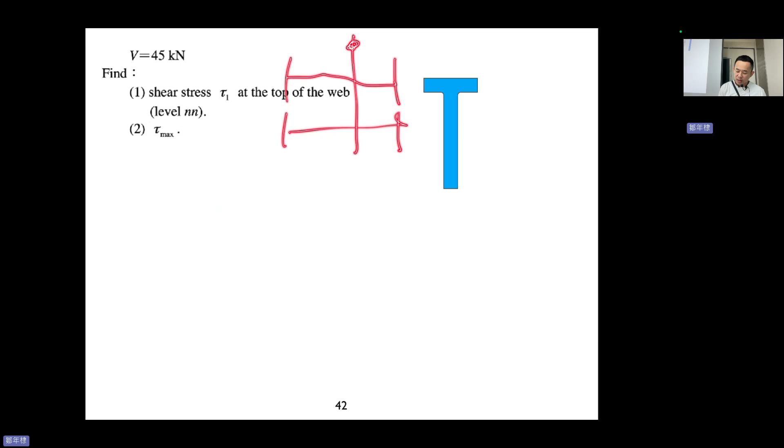We just tell you to ignore the chapter 4 things, we just obtain V equal to 45. Here V equal to 45.

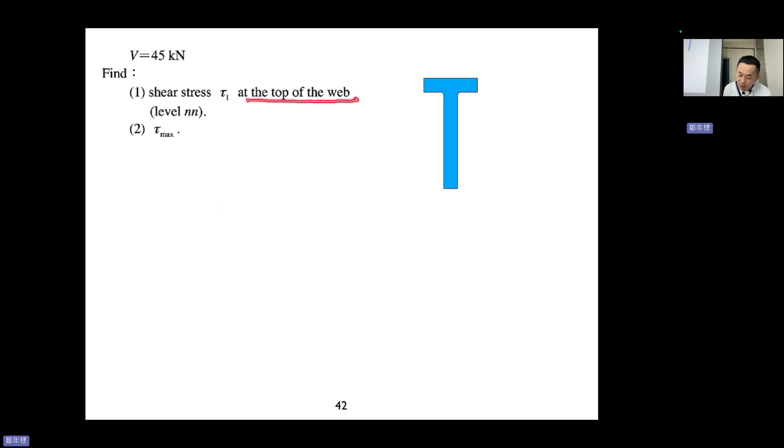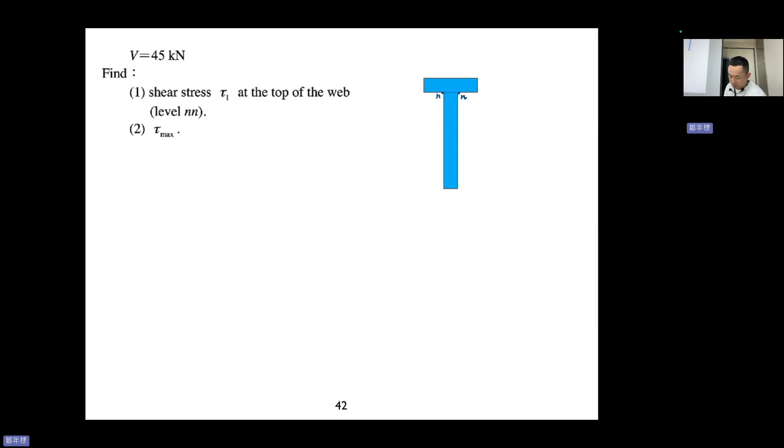What is the shear stress tau 1 at the top of the web level NN? What is NN? I will give you the NN point.

We want to know the shear at this level, this is called tau 1. So we want to obtain tau 1 at the top web level NN, and they also want us to know tau maxima - what is the maxima in this figure?

Now where is the neutral axis? The first step is just the neutral axis. A equal to sigma AI - there are two A here.

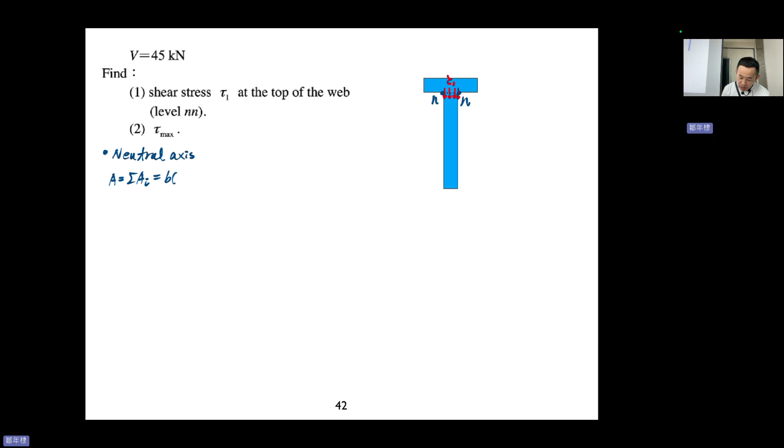The first one is B times H minus H1 - that's the top flange, and then T times H1. Sorry, let me write this down first.

B equal to 100 millimeter, and H1 equal to 176 mm. This is H1, 176 mm. The second one is H equal to 200 mm.

So the total height is 200, and T - what is T? T equals 24 millimeter.

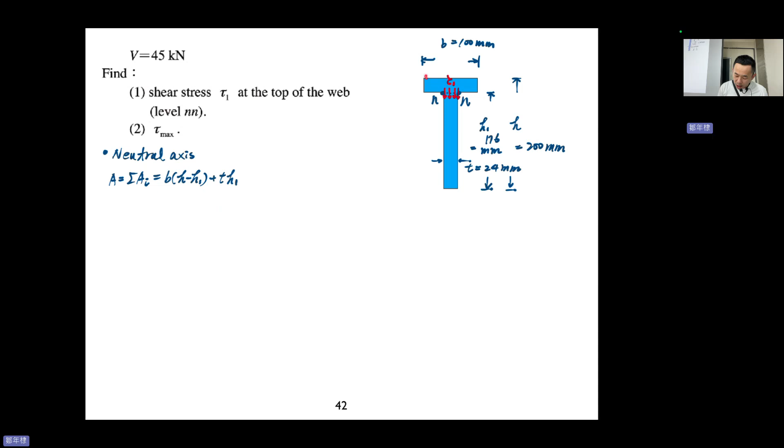So this is the problem given. So two areas: this one is B times H minus H1, and T times H1. Two areas, sum them up together: 100 times 200 minus 176, plus 24 times 176, equal to 6624 millimeter squared. So A is already here.

Now we are going to determine the centroid of this T shape. Remember, we are going to determine the coordinate of the centroid, so first we set our own reference coordinate. You can set it anywhere, but we recommend setting it at either the top or bottom. This time I choose the bottom.

We also know that the y-axis must be at the middle, because this is symmetry. So this is y, and we call this AA. The AA line axis is arbitrary.

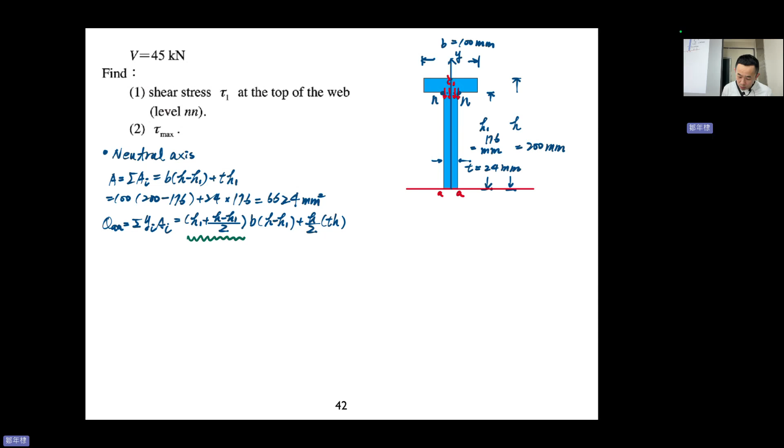sigma Y I A I. So H1 plus H minus H1 divided by 2, times B times H minus H1, plus H1 over 2 times T H1. So what does that mean? H1 plus H minus H1 over 2 - it is actually this.

Okay, so this is the first area. It's a... what's that? Centroid of the first area. And the coordinate of this is this green distance. The green distance is H1 plus the thickness half.

So this, all right. Then times B times H minus H1. So this is the A, right? This is the A1. Okay, what is the A2? Sorry, it should be 1, right? Then,

Okay, and the second area, TH1 times its own centroid. Their centroid is here, right? The second area, centroid is here. So centroid is here, suppose it should be a pink, all right? Okay, so it should be half H. This area, the second area, half H. All right.

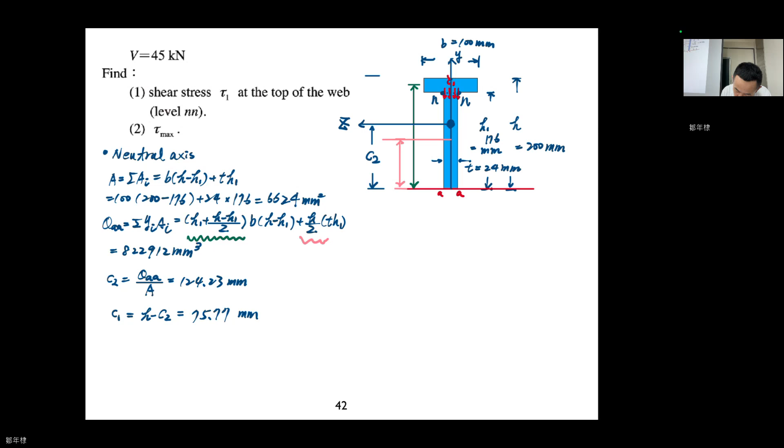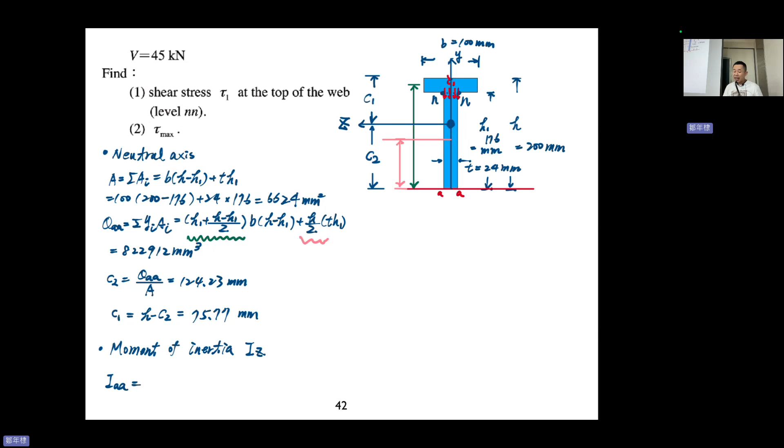Finally, or not finally, secondly, we are going to calculate moment of inertia, IZ. Okay, IAA equals to, okay, IAA. Now we need to do IAA. Okay. It is really interesting. Okay, we are going to determine IZ, right? Why I'm using IAA? This is a trick. Okay.

Right, so when I told you, parallel axis theorem can only move from the centroid to other axis, right? But this is really weird. To do this, you can do this area and move to here, and you can move this central area and move to this. You can do that, and you can go back home. I encourage you to do that.

Okay, or there's the interesting solution 2. Okay, I'm going to introduce solution 2. Interesting, we are going to use a very similar negative area approach. All right, I will draw that and you will understand. This is the first area, positive area. And then the second area, wow, is here.

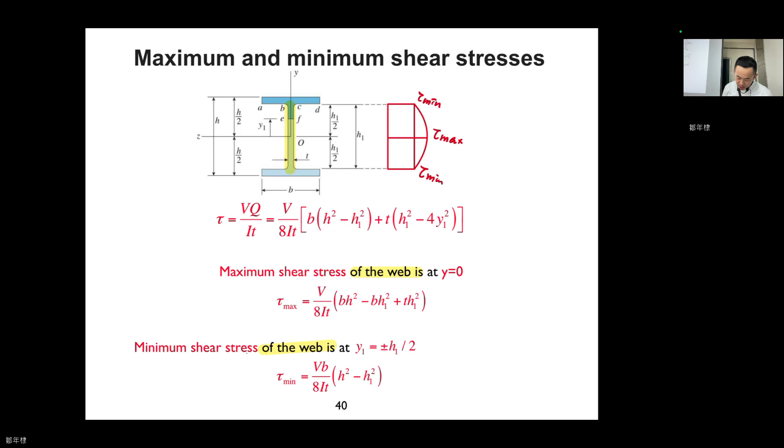Here we said, let me take a look. Q, yeah, you see this area, the T is actually the width of the web. It's not the bigger width. All right, so you can see tau equals VQ divided by IT. T is still the small area.

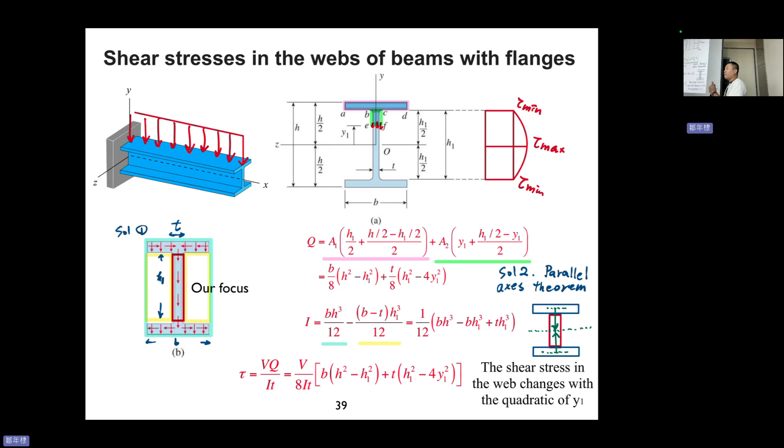So now here you see VQ1 divided by IT. Okay, IT. So this T is 24 rather than 100. Okay, you need to be really careful about this.

Okay, so if you can accept that, 10.9 megapascal, that's tau 1. Right.

Next is tau max. Okay, this is kind of tricky. So if we want to get tau max, we need to get Q max, because V equals the previous one, I equals the same, T equals the same. So we want to get tau max, we need to get Q max. So what is Q max? Remember, our shear has maxima at the centroid, right? Neutral axis.

So Q max supposed to be this one, right? This one. So Q max should be this one. So how to determine that? We can do this area times this distance, and also plus this area times its centroid to this distance. So you can get Q max by this method.

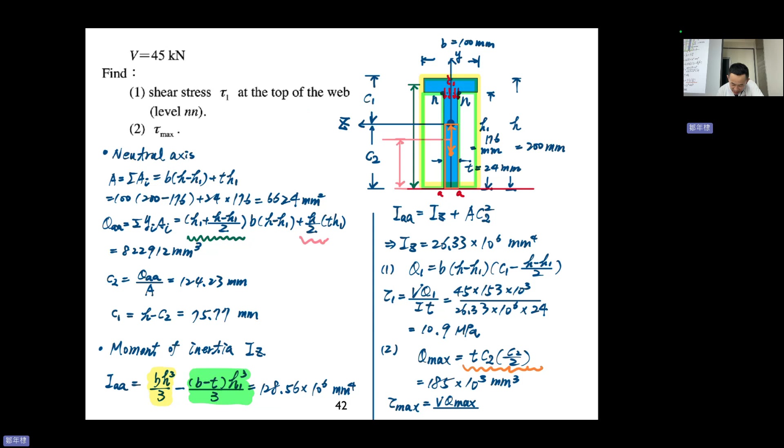All right, so we substitute Q max. VQ max divided by IT, IZT, and it equals 13.2 megapascal. And you can check - yes, it's actually greater than tau 1, which means that we are correct.

Okay, so this is a really difficult example, and I would prefer you to check that. That's it - that's the most difficult example in chapter 5. All right, congratulations, you've done it.

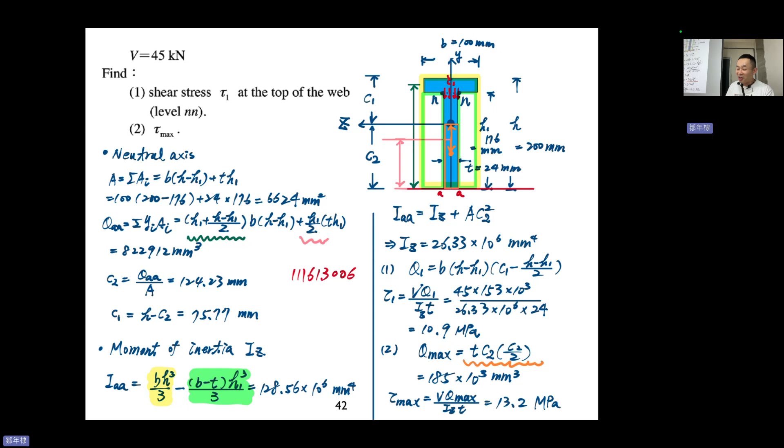All right, next page, beam with axial load. So actually this is chapter 2. For example, this is an example with a beam with fixed end. And the fixed end, I will give you an axis: this is x, this is y. This is side view. And because of this, you will have an oblique force.

Which means you have Q, and this is S. Let me draw it dashed. So which means the Q and S are the components of the P, the 分量 (components). And you can have the reaction force at the fixed end.

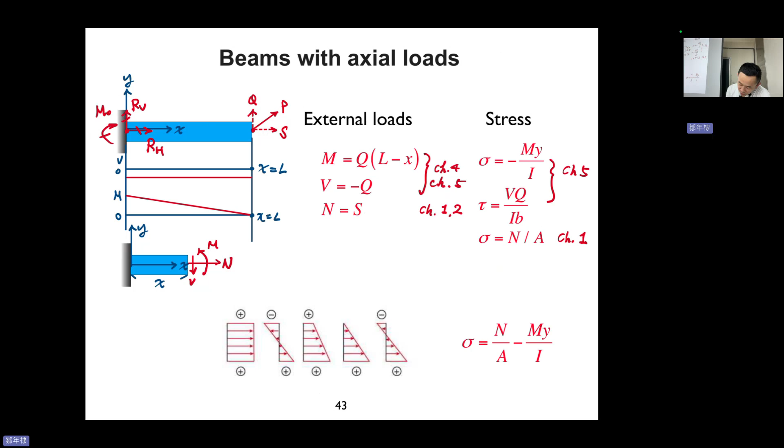So now, remember that chapter 5 will give you... chapter 1 will give you normal stress. Sigma equals N divided by A. So if you have an axial normal stress, you will have this stress distribution.

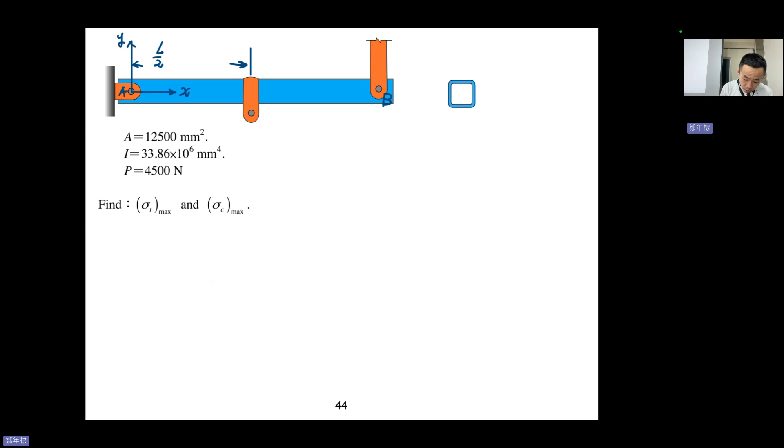Next example - okay, I'll give you the question. First, here is X, here is Y. You can see this is the side view, and this is point A, and point B. The distance is L divided by 2 equal to 750 mm, and this is also L divided by 2, 750 mm.

Then this is the middle part, the neutral axis actually. And the distance between this is D, 140 millimeters. And there is a load acting obliquely, P equal to...

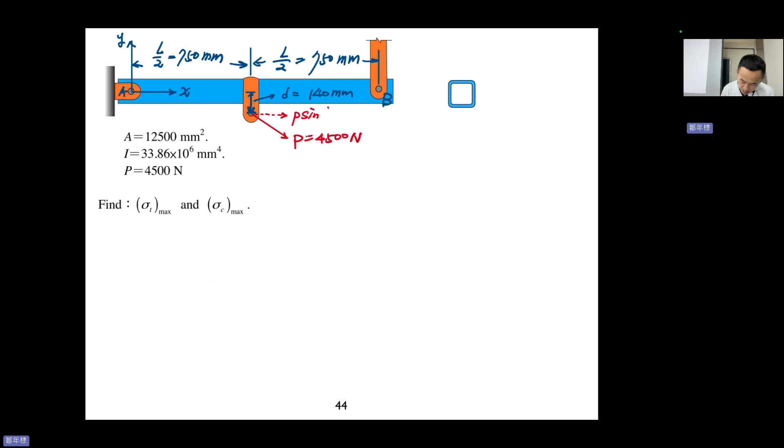P equals 4500 N. And the horizontal component is P sine 60 degrees, and downward is P cosine 60 degrees. So this is the problem.

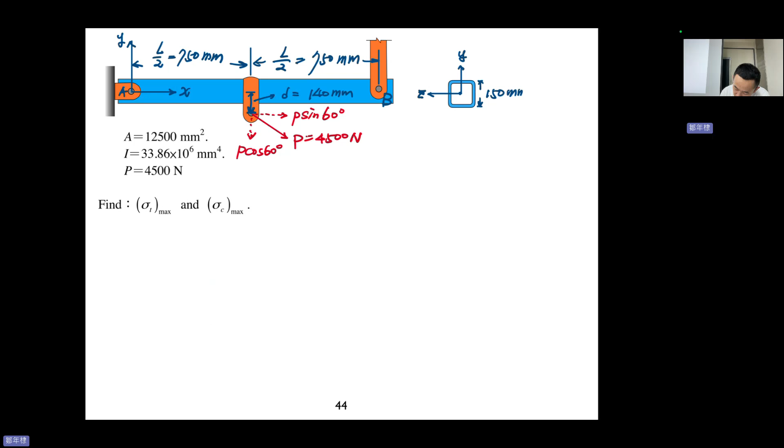Also, the cross-section view - the cross-section is a hollow square shape. You see Y and Z. So this is the cross-section view. Here this is 150 millimeters, this is B, 150 millimeters. And this is really interesting - it directly tells you the area.

And directly tells you I. So A and I for this cross-section are given. That's good, we don't need to determine that. It's also a symmetric cross-section, so we don't need to determine the neutral axis. A and I are given - no problem, that's nice.

P is 4,500. So again, find sigma T max and sigma C max. Well, that will be a little bit difficult. So I'm going to...

Draw the chapter 4 things for you, starting from here. So this is Y, and this is... right. You can see this is a real world problem, but now we're going to reduce it into a chapter 4 problem. That will be a little bit weird.

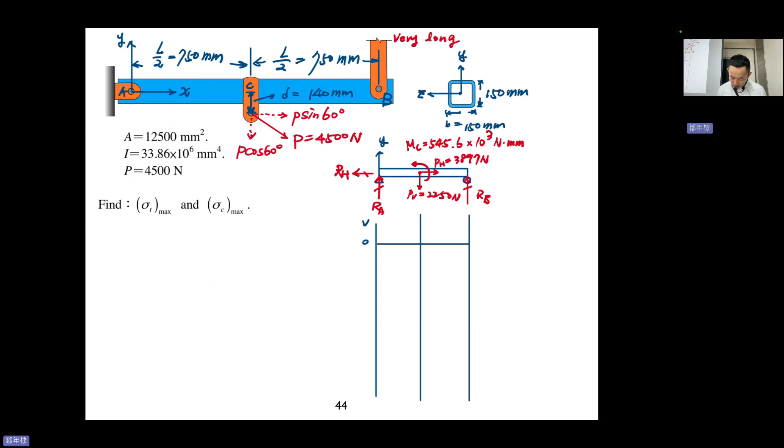Okay, and we can start drawing the shear moment diagram. Shear moment diagram V, and M. And interestingly, N, okay, this is actual load, actual force diagram.

Yes, let's take a look. You know how to draw V, here and here. Okay, so here is 1489 and this is minus 761 N. Okay, and there is a, okay, and this, hey okay.

Well, I didn't pay too much attention here because it's chapter 4, you know that, but I will give you the answer. What is that? This is 1116.8 times 10 to 3 N dot mm, and this point is 571.2 times 10 to 3 N dot mm.

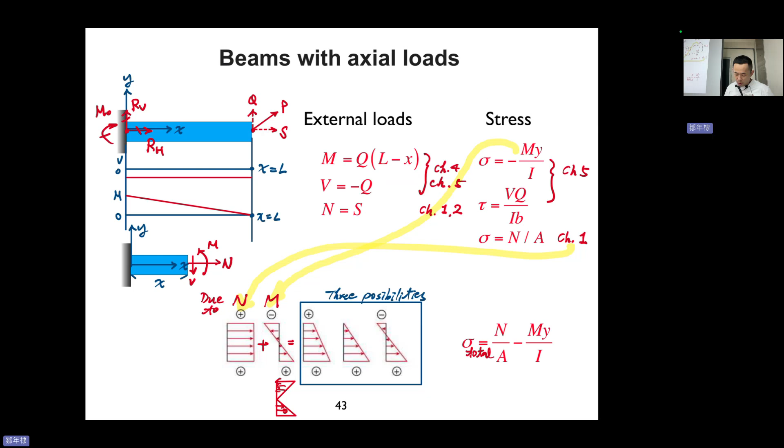Okay, so that's the shear moment diagram, and you can go back home and draw it by yourself, practice by yourself. So after we draw this, we can go back and say, okay, what is the actual example asking? It's called sigma T max, sigma C max. The reason why we are going to determine N here is because N also affects the sigma T and sigma C, right? Because remember, your normal force will affect the final result of the compression or tensile stress.

Okay, so that's the reason why we need this. So now we are going to determine what is sigma T, sigma T max. So where is the sigma T max? Sorry, I skipped one thing, I forgot to mention this jump. Okay, this jump, sorry, let's go back to this jump. This jump is 1116.8 jumping to 571.2. Why? You can see that, okay, let me draw here.

If you remember, you have a stress element, right? This is M. Before you have an MC, the MC is counterclockwise. So before MC, this is M. So what is the M to the right hand side? Your M must be minus MC so that you can balance, right? So if you're here, this is the happy curve, M.

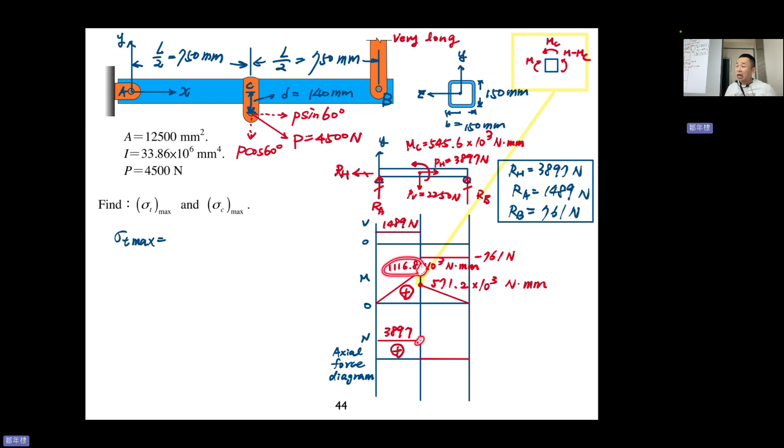Then let's continue. Okay, sigma T max. Where will sigma T max possibly occur? You see, this is positive, this is positive, this is positive, so tensile must happen here. It must occur at this position because this is the biggest moment and biggest N. So no doubt. So: N/A minus MY divided by I.

So 3897 divided by A, 12500, minus 1116.8 times 10 to the 3, times—very important—33.86 times 10 to the 6 is I. So what is the empty space?

75, and minus—okay, because this is C2, sorry it should be bottom. So imagine at this point it has the greatest moment M, and this is positive, so it should make this. So bottom must have the tensile due to the M, and also the N gives a uniform N. So you have this due to M, this due to N, and you need to sum them up together. The positive moment will make the bottom tensile.

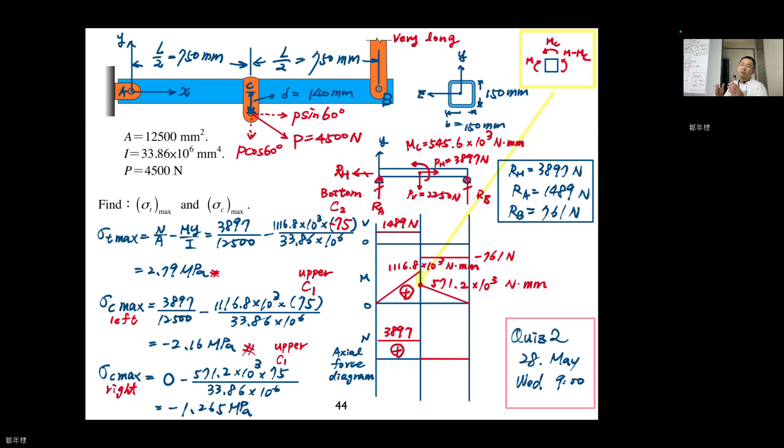And the next one, Chapter 7, will be our last chapter in this course, and it will be relatively easy, not that difficult anymore. But Chapter 7 is the most important chapter for the material science engineering department, right? In other universities like Oxford, or in the UK, they have their own entire lecture called stress and strain analysis, one whole lecture just talking about this. But in this department, we only have one chapter. This is a little bit weird, but well.

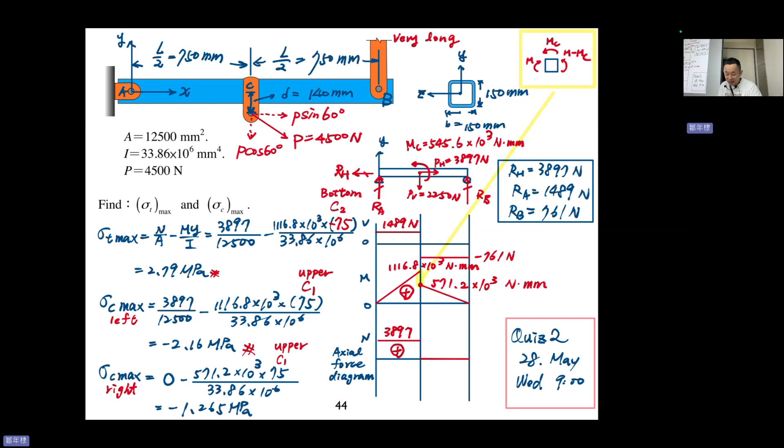Next one, Chapter 7, analysis of stress and strain. This was one entire course in University of Oxford. When I studied in the UK before, this was an entire course, but here we only cover it in one chapter, a bit of a pity. But this is really important for material science engineering. The most important part is this, because you will know the general idea of stress and strain in the material. Wow, that's really difficult... well, not difficult, this is relatively easy compared to Chapter 5, but it's really important.

And it will be used anywhere in the material field, even in TSMC, in your company later, or anywhere. So again, because we are talking about stress and strain, we must talk about the stress element. Because when we talk about stress element, we actually talk about the material point in the material.

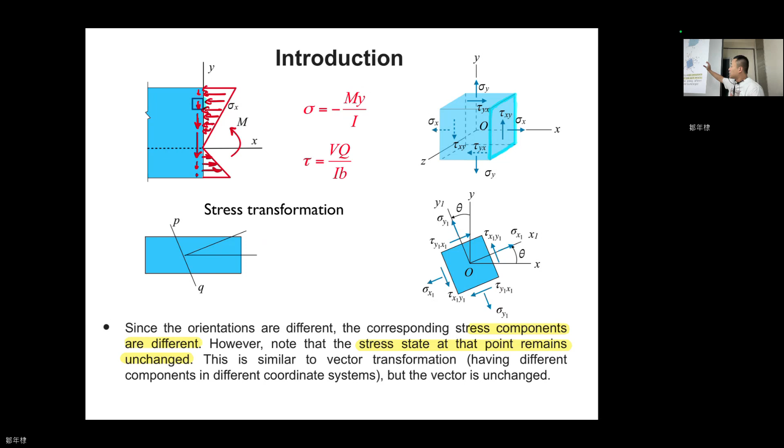Here, the stress state and stress condition are all the same because we are talking about the same material property, same material point. The reason we get different values is because we choose a different coordinate. If you have a different coordinate, you will have different component values. But just like a vector, you change the coordinate, you change the component, but the actual vector value will be the same.

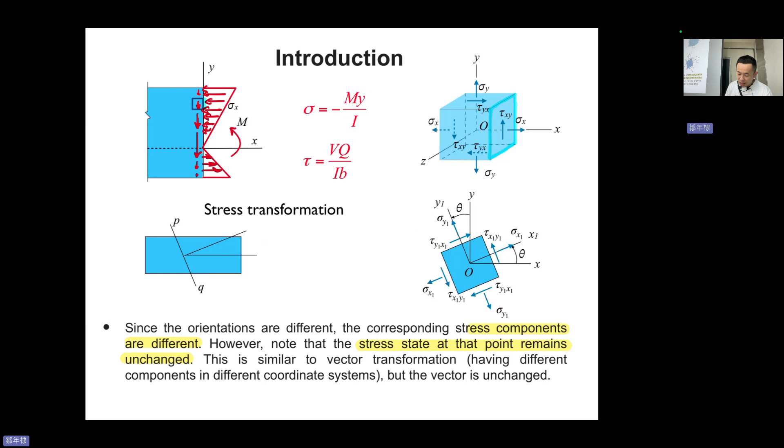All right, so this is really important. Now I'm going to give you a stress representation. This is really important. The normal stress we typically call sigma x. This is sigma x, positive x direction, and on the positive x face. You have positive convention because it's tensile. Tensile will make it positive, no problem. It's normal stress, sigma x.

But actually, in other lecture classes, other universities, or other textbooks, we typically call it sigma 1,1. Because x equals 1, y equals 2, z equals... I should say x, we're using 1 as a representation, 2, 3.

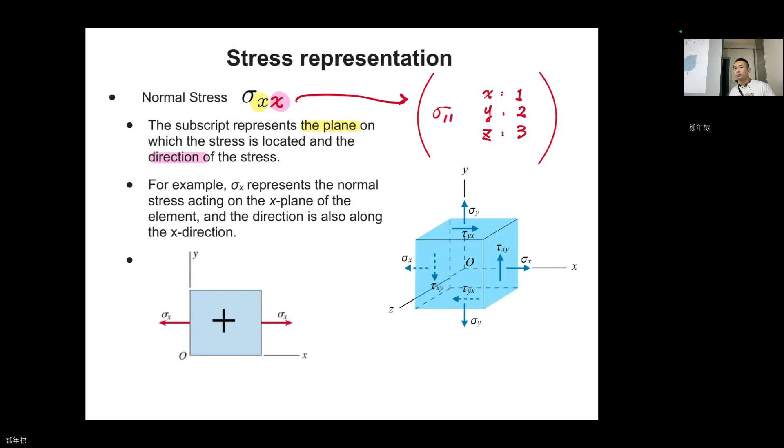So you can see it here, sigma x. You should have sigma y as well. In this textbook, for simplicity, we just reduce the second repeated index, giving sigma x, sigma y. But in other textbooks, it typically says sigma 1,1. All right, now next one, very important.

In our textbook, we use tau for shear stress. Tau x means the plane, y means the direction. And in other textbooks, we are not saying tau, we say sigma again.

So maybe you ask, hey, if you're using sigma, will it be confused with normal stress? No, because x equals 1, y equals 2, this is sigma xy. So you see, this is x plane, y direction. It must be a shear because the values are not the same, not 1,1, not 2,2, not 3,3. This is 1 and 2.

So this means the direction must align on that normal, on that plane. So it must be shear. So actually, the tau symbol is useless. From now on, after you graduate this course, you can name the stress, whether it is normal or shear, using sigma, because you can identify whether it's shear or normal by the index.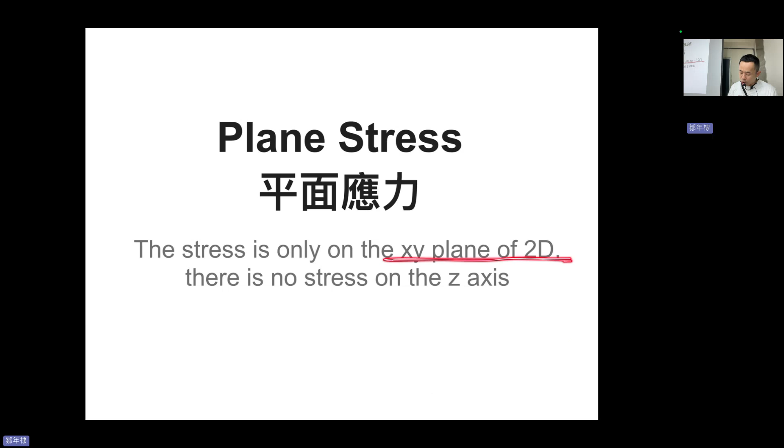Now, tomorrow I'm going to introduce plane stress. What is plane stress? Plane stress is when we only talk about stress on the XY plane, no stress on the Z axis. So everything will be easy, okay? And I will give you an introduction and proof, and the proof also covers 95% of proofs in mechanics of materials, which is stress times area equals force, balance, and you can get a result.